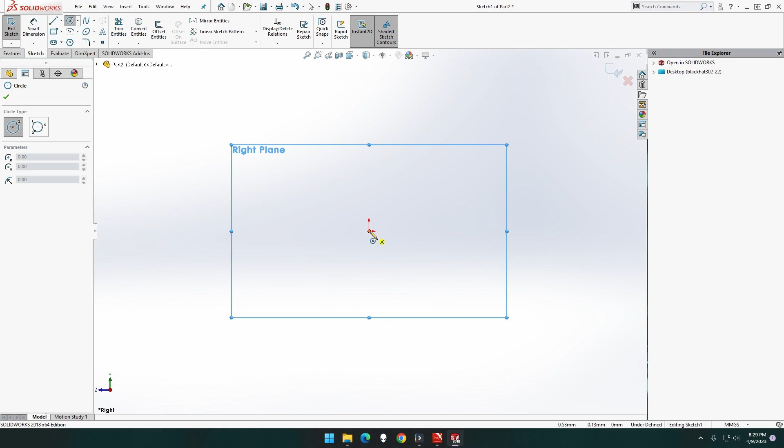Let's go to File, New, Advanced, Part MMGS. Then we're going to go to right plane, sketch. It's going to be a circle. Let's do 2 circles, center, and that's going to be 16. Oh no, not circle, dimension 16 and M10, which will put the thread in this a little bit later.

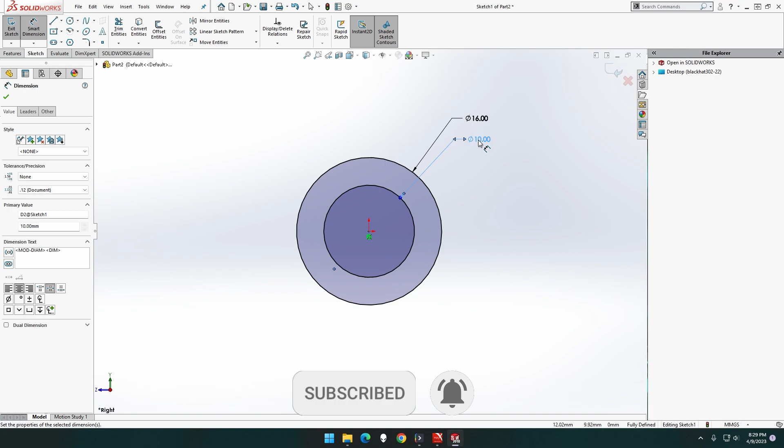That's going to be feature, extrude, mid plane, that's going to be 21, and done. That's that part done for now.

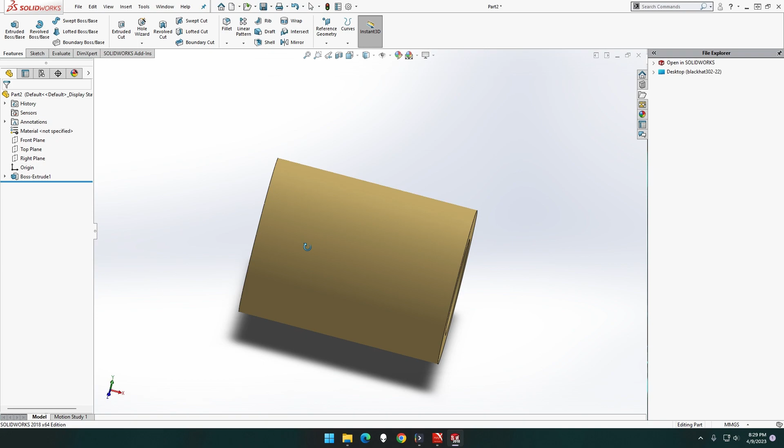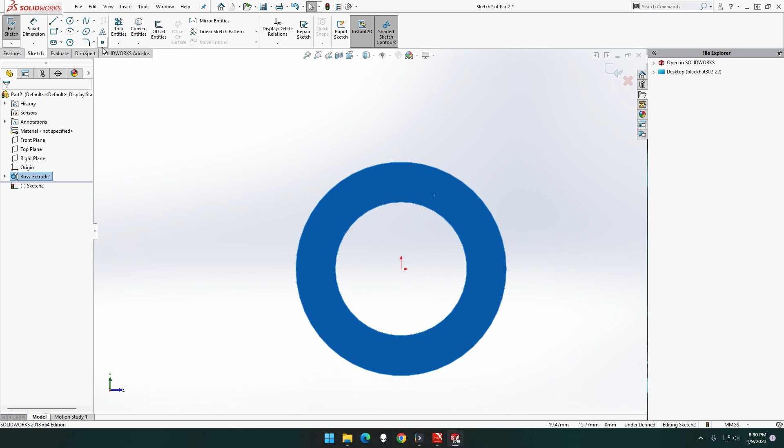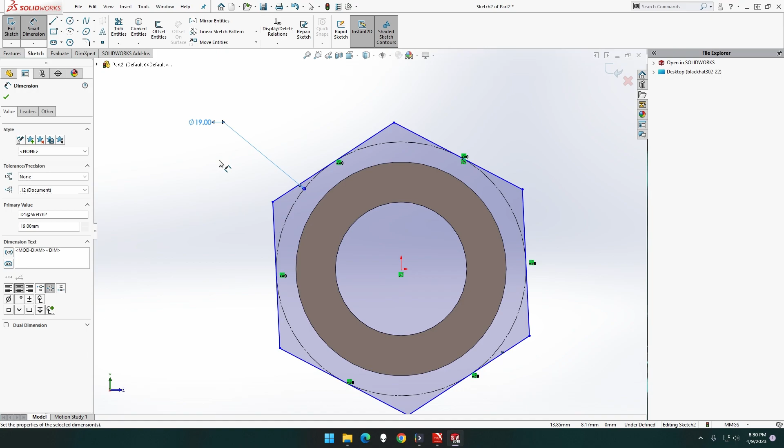Now on the end of this one, we're going to do a normal sketch, and that's going to be a hexagonal. Zoom out, thank you, that one there. Click out, that's going to be 19. And that's going to be a width of 5. Feature, extrude, 5, and done.

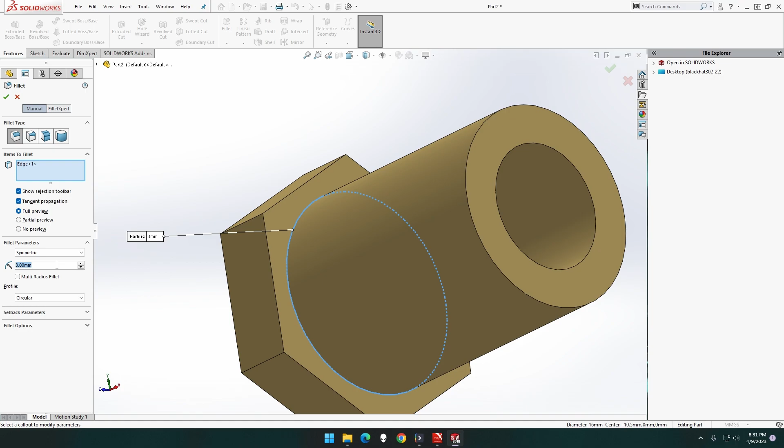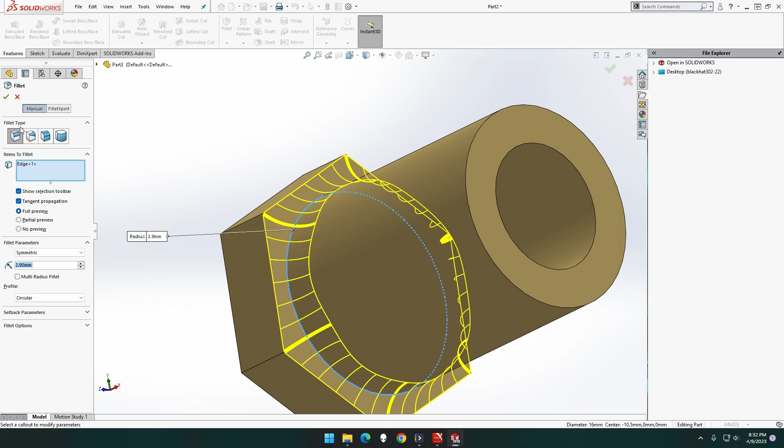Go fillet that, 1, 2, nope, do that one, get rid of that one. Try 3, 2.1, 2.2, 2.5, 2.6, 2.7, 2.8, 2.9, 3 didn't work did it? Nope. So 2.9, there we go. Let's put a nice little bit of edge on there. That's cool.

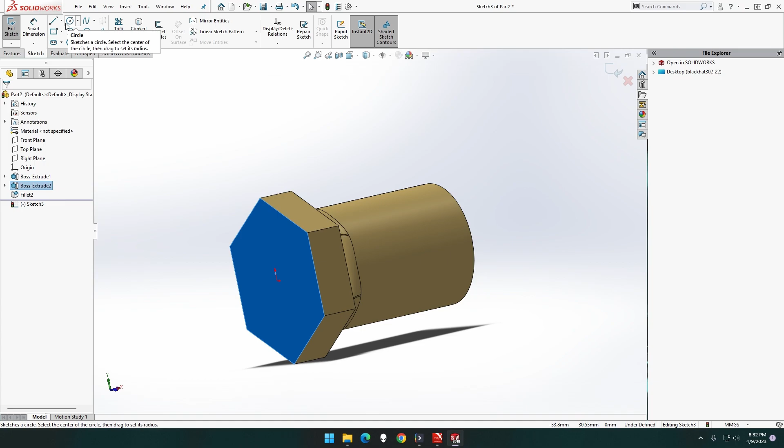Now we want, okay, so at the end of this one we shall do sketch. I'm not worried about normalize. We want cylinder center, that's going to be 10. So, oh sorry, smart dimension, 10. That's going to be extrude out by 8, and done.

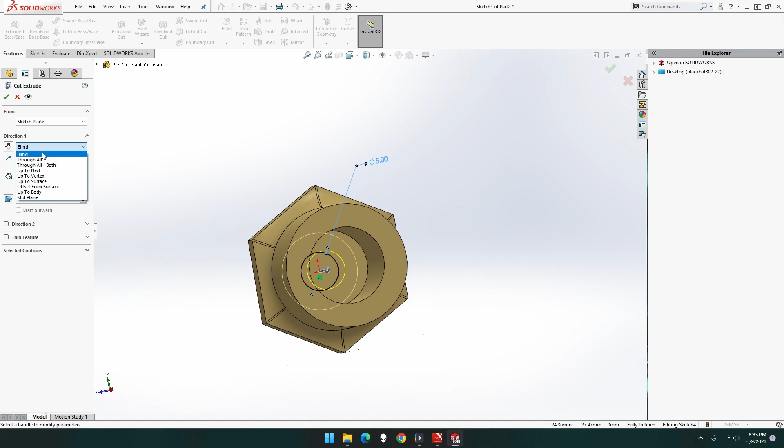Now this part here will be sketch, circle. That's going to be 5. That's going to be feature, extrude. Nope, not that one, sorry. Up to next, and done. There we go.

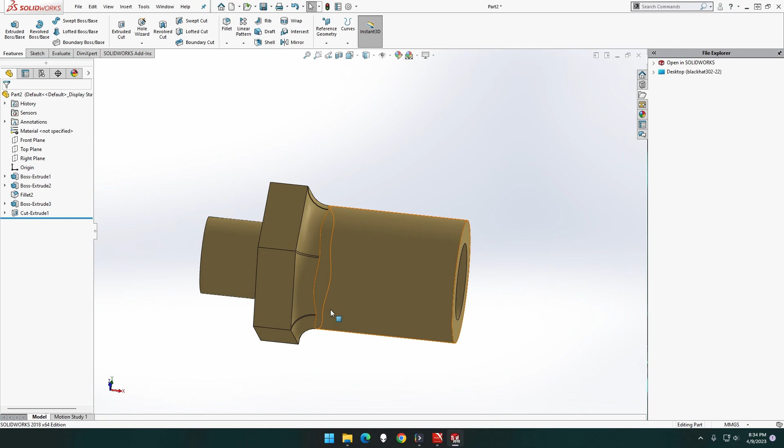Now we want... I should have done that hole last. We've got to do one piece up. Sometimes it's best to do all the pieces and do the holes later. But we'll probably have to recut it out, so that's fine. Let me just do it this way.

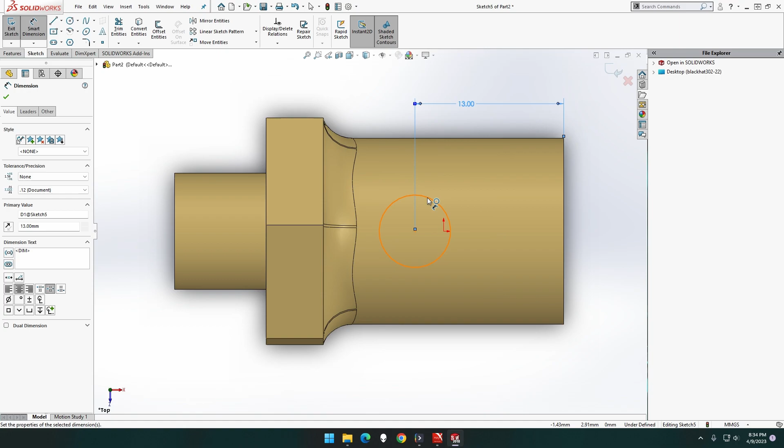So we want top, not that it really matters, but we're going to go normal to and sketch. That's going to be a circle. I'm not going to put a second circle, it's a hole one, but I'm not going to do that just yet. So dimension from that edge to that one, it's going to be 13. That's exact, and that's going to be 10.

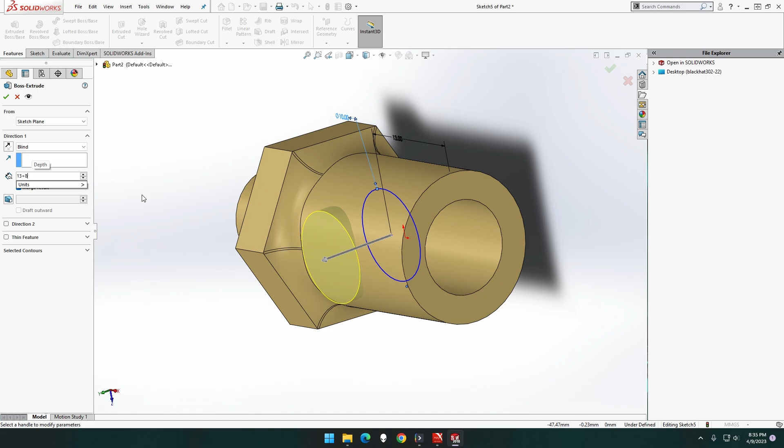And that's going to be feature, extrude, 13 plus 8, because this is 16. It's 13 from the bottom there, but I'm starting halfway, so plus 8 because that's 16. And done, yeah still got that part in there. So sometimes best to do the circle holes last though, okay.

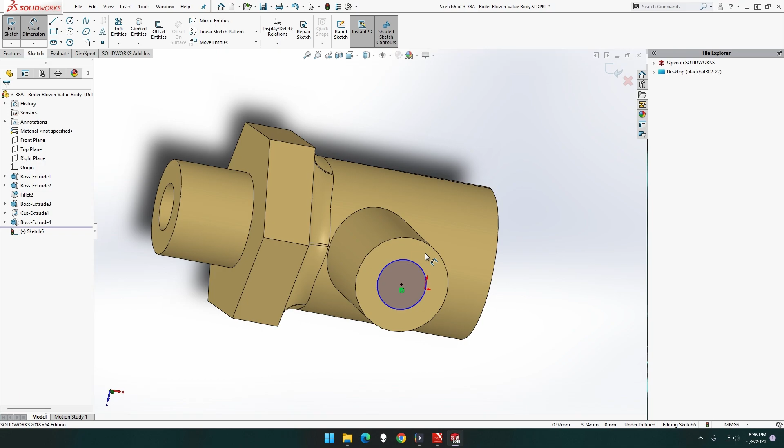Okay, so sketch on that side, circle. Touch the center there, so then you've got the center of the circle, because that center's out, that's not the center of this circle, so that's the center of the whole thing. So sometimes you can't always use that. And that is 5 mil. Extrude up to next and done.

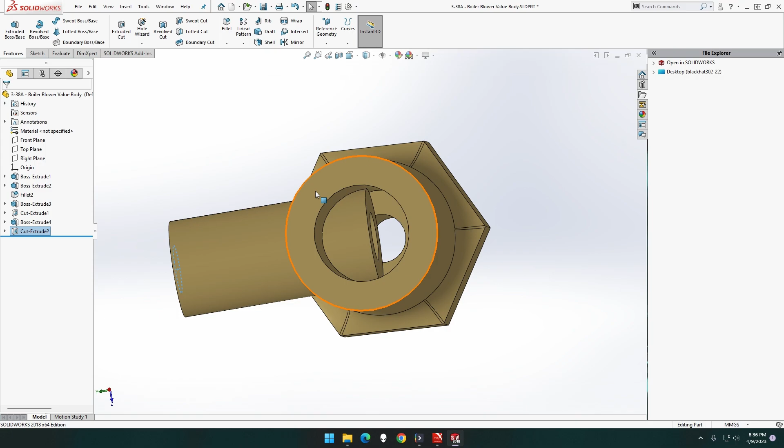That's good, now we need to cut that out. As I said, I didn't do the circle first. I could put this piece in, do that circle, then do that circle. So sometimes it's best not to do these circles, draw a hole straight away. So sketch, circle, click on that, feature, extrude. That's good to show different ways too.

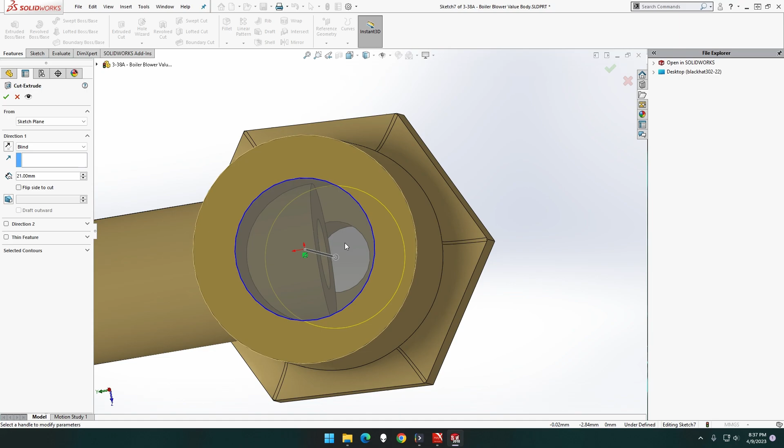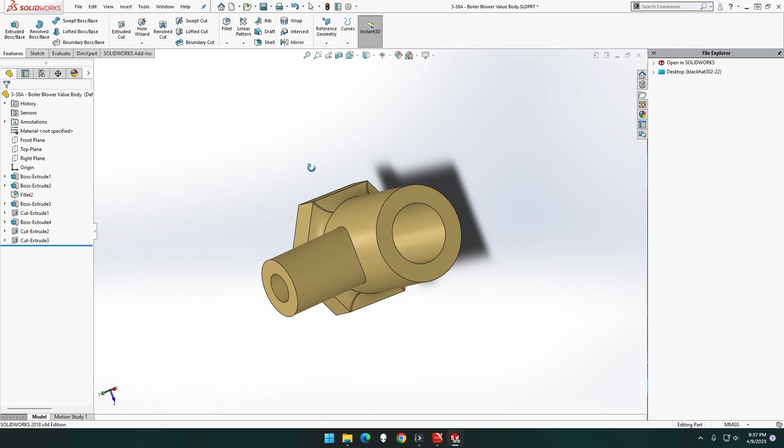So up to next, nope, up to, go blind. Actually what I'll probably do is 21, let's keep that 21 because that's what it was. So there we go, so it worked out the same, but it was just extra steps. Let's see, that's everything in there. Yes it is.

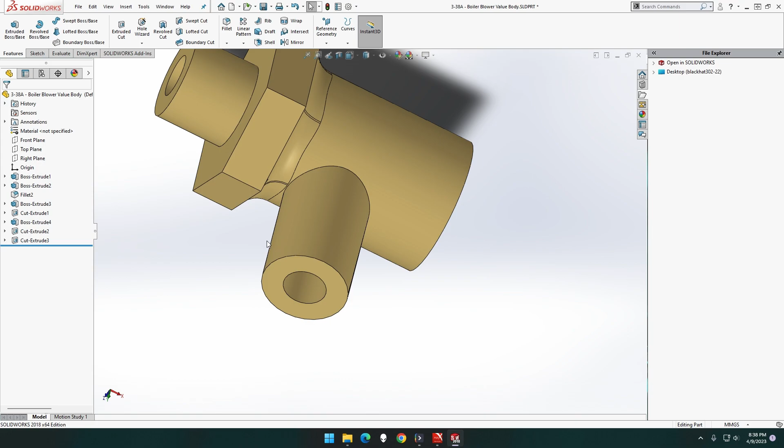We just need to do a 10 mil on here, 10 mil inside, 10 mil outside, and we just need to shove a little chamfer on there. Not quite. That's a bit better, one. There you go, 1 mil, and that is done.

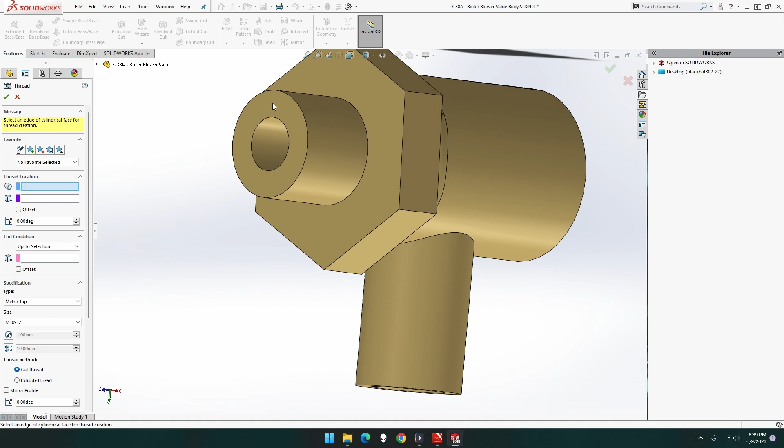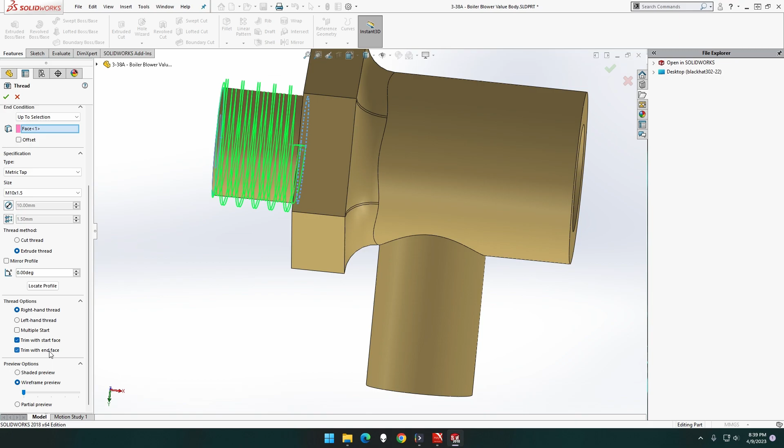Okay, quick save, we now want thread. We want 10 mil, ten by 1.5, thing I've been using if I remember correctly. Start there to there, oh there, sorry, God it doesn't move automatically. And we've got that right, green, hopefully that's the right way this time. Trim and trim, and I bet you it's the wrong way. Oh, we got the right way, makes a nice change.

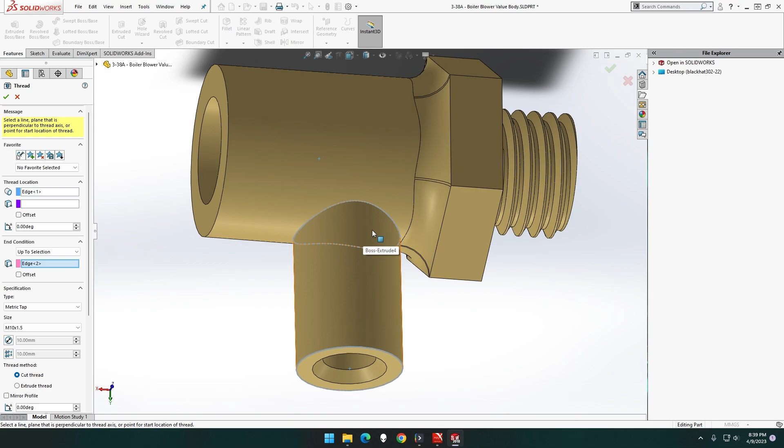Okay, so again with this one, thread from there, click that to there. Okay, because that's oblong, it's not enjoying it. Okay, so if I swap these two around, what's that do? If I do that one, let me delete that, clear the selection, clear. So if we do from there, okay, gotta do that first. From there to there, what does it do? Nope, it does not like that either. Interesting.

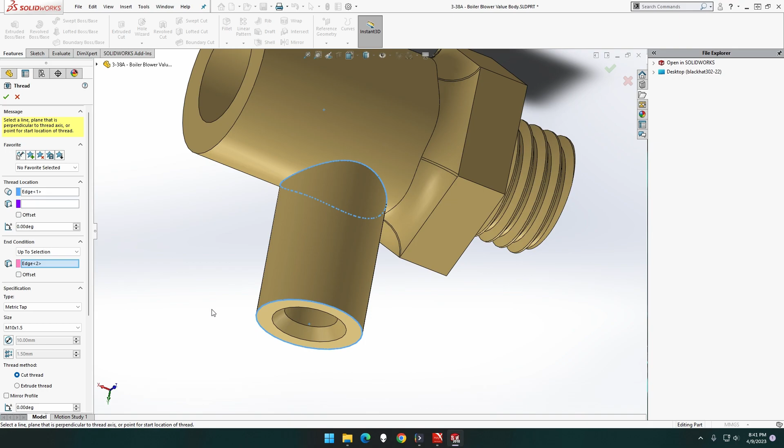Okay, I'm just going to do a little technique I've done once before. I'm going to go out of that, go to normal, sketch. I'm going to do a hole, let me get the center point, let me smart dimension, that one to that one. Oh no, that's not going to work. What's that, 10? So let me just do that one, it's going to be 9.95.

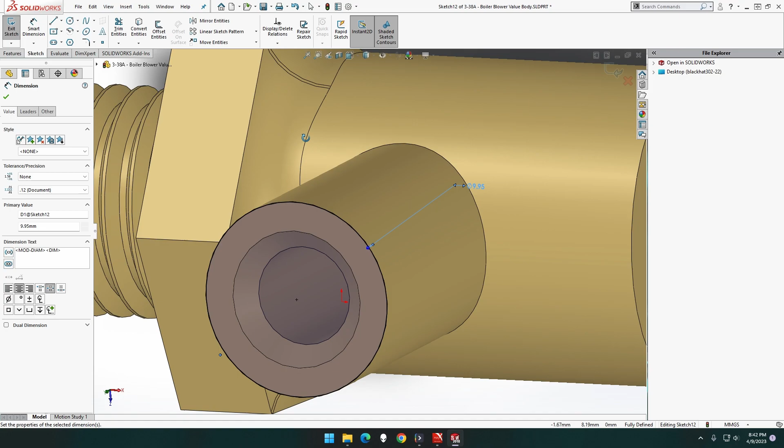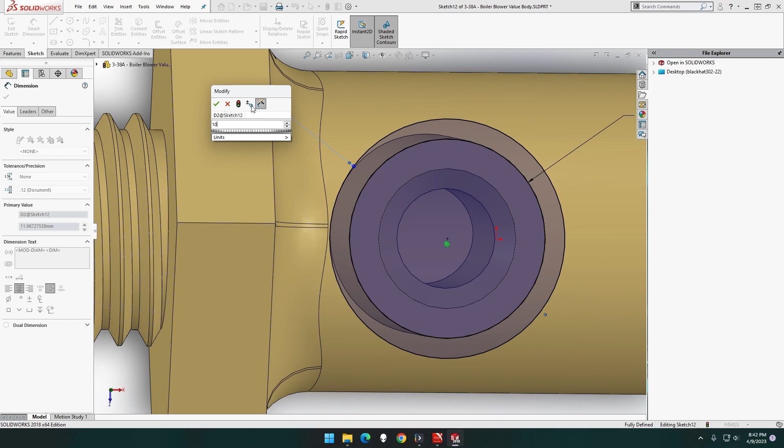And okay, let me do another circle, that one's going to be 10. Feature, extrude. What's that say, 13? Say 12.5. Say 13, what's that do? 13, there we go, see now I've got the circle on there.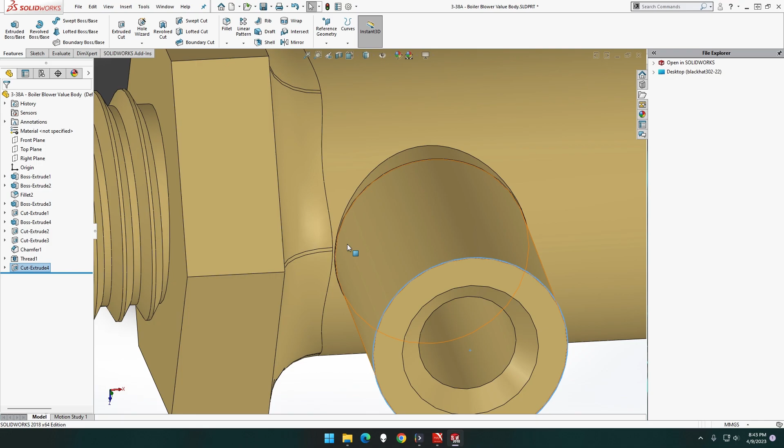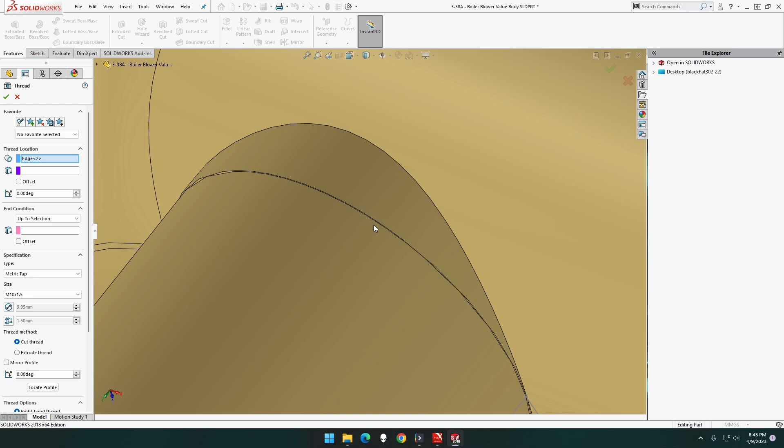Now what I can do is, this is like a workaround. Thread, grab that one, and that one. Oh man, I keep it, it doesn't change, I'm used to the others change, otherwise this one doesn't. Okay, that one there. There we go, it's a workaround, it's not perfect, not ideal. Now if you're doing this for a really professional job, you would not do it that way. So if anyone knows how I can do a thread from there up, let me know, or got any idea what I could've done, I would appreciate it.

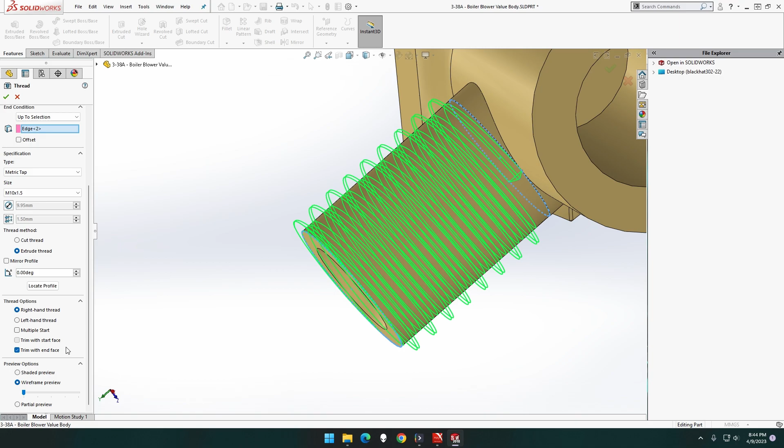Thank you, extrude, trim and trim. So I'm always happy to learn, I'm always happy to teach others if I learn something new.

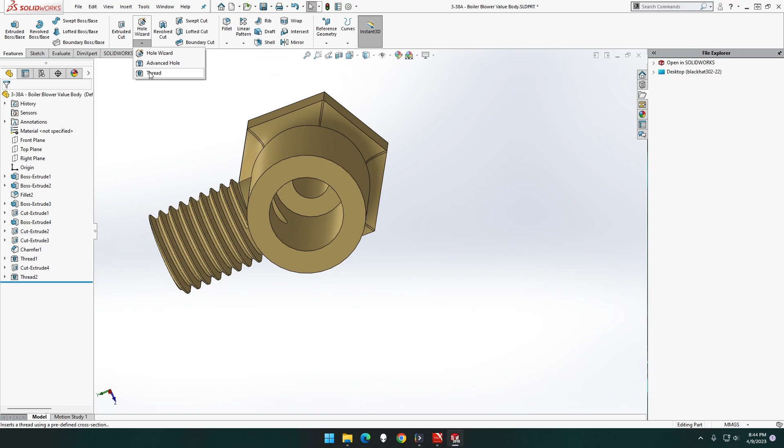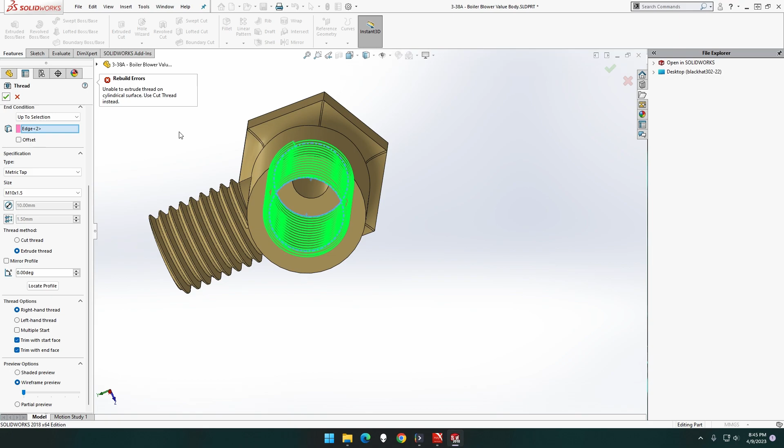There we go, now we need one on this side. Now this probably should have gone, because this has got to go away the end. All the way in? Shows all the way in. Okay, so let's try thread, the end, the end. Where are we? Extrude, trim and trim, and done. Extrude thread on cylindrical surface, use cut thread, oh dang it, cut, sorry, and done. Oh that worked out, that's right, yeah, being cut. I was too sure the hole would screw it up, but no, it worked out good.

Okay, it should be done, let me flip it around a bit. Alright, that's part 3-38A, the boiler blower valve body, done.